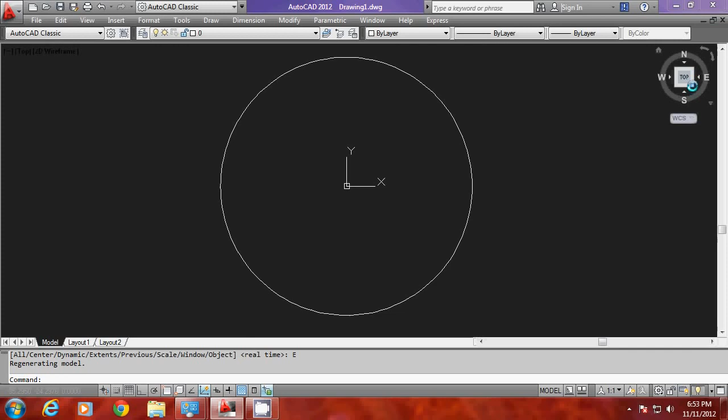Now, I would like to switch over to isometric view. I'll just click over here to get that, or else you can give viewpoint command. I'm going to add a thickness to this tabletop. I give extrude command, and when I'm asked to give the height of extrusion, I'll enter 3 because I want the thickness of the tabletop to be 3 units.

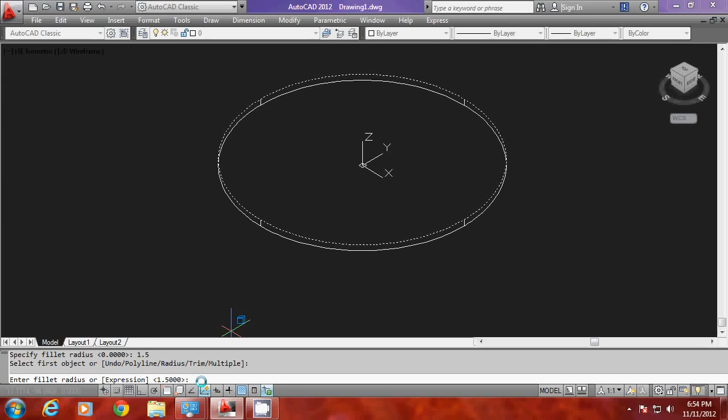I would like to fillet this corner because this corner is a sharp corner, so I'll give fillet command. You know, fillet command can always give you a smooth corner. So I'll give a radius option, and I'll give a radius of 1.5 units, and I'll select the first edge to be filleted. So it'll ask you for radius once again. I don't want to change the radius, so I'll just give an enter. So it'll ask you to select the next edge, so I have selected it. I'll give one more enter, and I have got the corners filleted.

Just give hide, but you can see that the edges are segmented. If you want to increase the number of triangles in these curved faces, you can do that with the help of a variable that is called FACETRES. So I gave FACETRES, and it can take values from 0 to 10. I gave 10. Now give one more hide to see that you have increased the number of triangles in the curved surface. Now you have got a smooth curve.

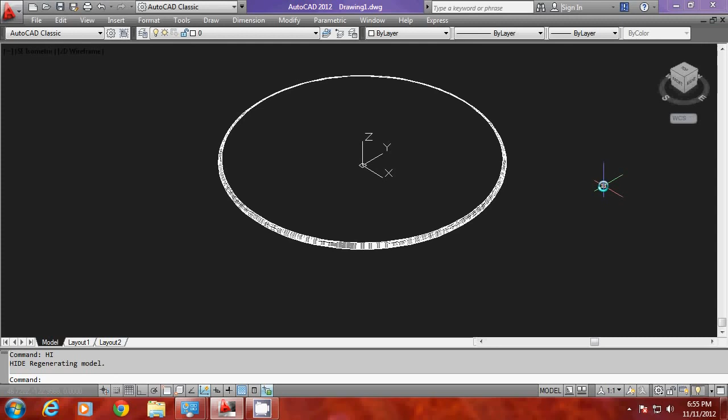Now I would like to switch over to an elevation. So I'll just click on the front over here. I've got a front elevation. Next, I'm going to create the central member which supports the tabletop. So I'll start creating it by drawing a polyline. But if you want to draw a polyline, you can't do that in the ZX plane. You know that you have to align the XY plane here. So I'll go to UCS command, and I'll go to view option of UCS command, with which you can align the UCS or the XY plane with the existing view plane.

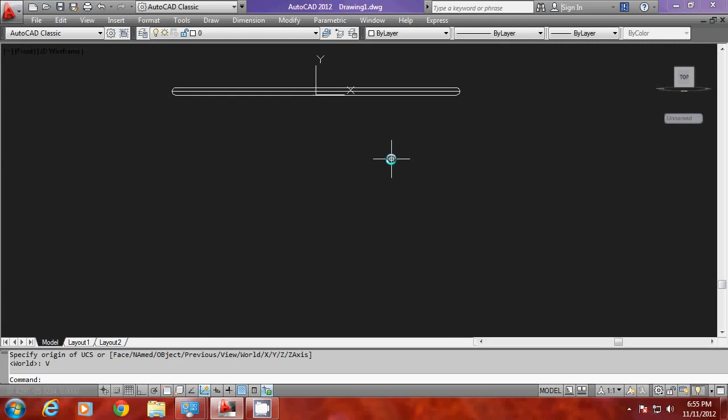Now I'll draw a polyline starting from the origin, and I'll show the length of the height of the tabletop. The height of the tabletop is 80 units, out of which 3 units is already given here as the thickness of the tabletop. The rest is 77, which I am going to indicate here. So I gave 77, so this polyline indicates the height of the tabletop.

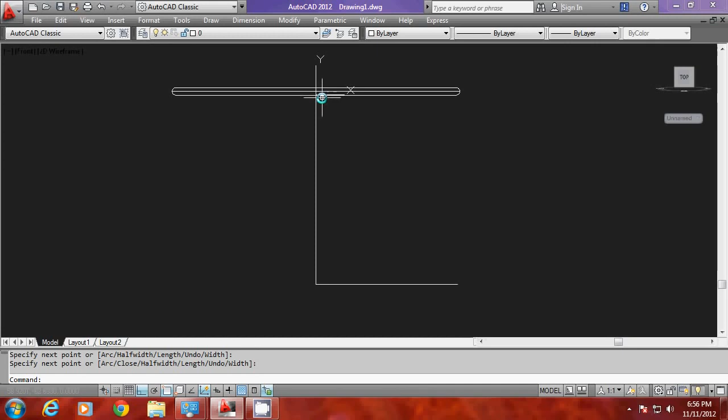Now I'll draw some construction lines. I give some offsets to draw the profile to construct the central element. So I made a horizontal line here. Now I'll give one more offset of 10 units upwards. Then I'll give another 10 unit offset, and I'll give another 7.5 unit offset. So when I trace the profile, these construction lines will be useful.

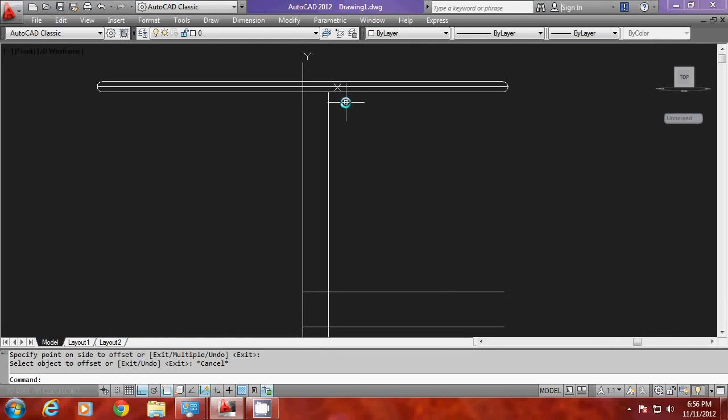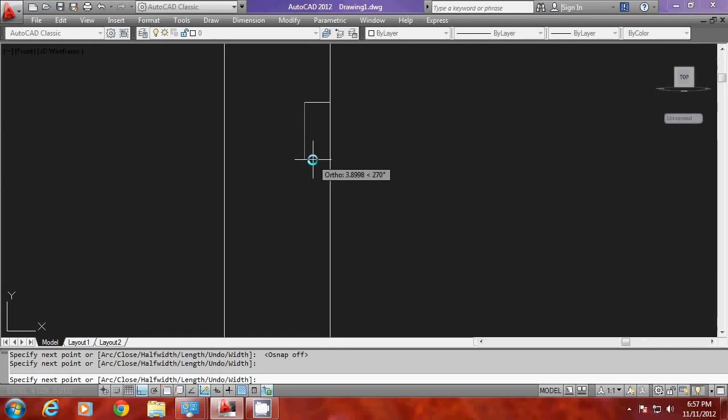Now I'll draw a polyline starting from 0, 0, and this polyline is going to indicate the profile for the central member. So the next endpoint I have picked here, I'll turn my OSNAP off by pressing F3 key, and I'll simply trace a polyline. I'll just switch over to arc option now. I give arc, then I'll go to second point to draw a curve over here. Now likewise you can sketch the profile.

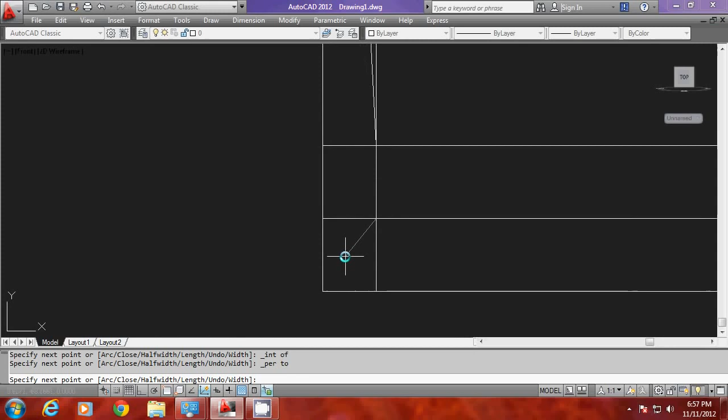Now I'll switch over to line mode, and I'll click a point over here to this intersection. Then back to perpendicular. Then I'll draw an arc like this. Then I'll come back to line mode. Then I'll go back to 0, 0 and close. So this profile will indicate the profile of the central member.

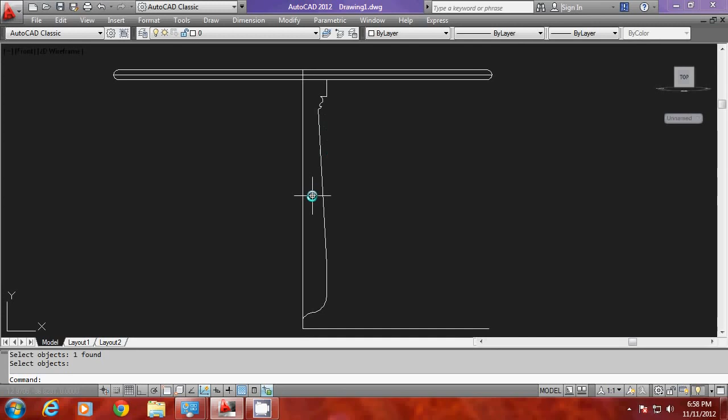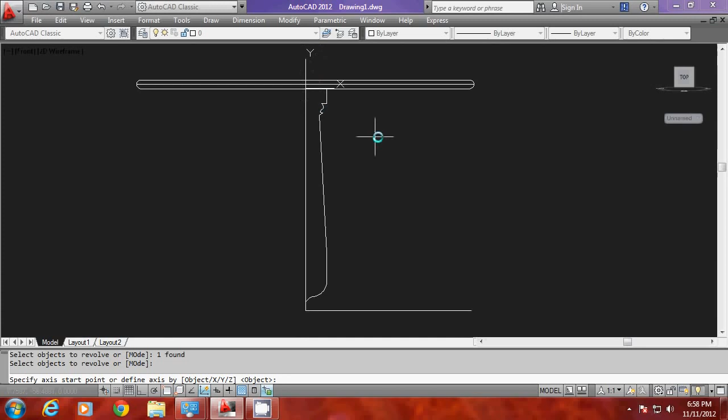This profile is going to be revolved about this vertical axis, or you can revolve it about the y-axis to get that central member. So I give a revolve. I'll select the profile to be revolved. When I'm asked to specify the axis, I have various options. I can use an object that can be used as an axis, or I can use the present y-axis as the axis. So I'll give y, so that will be used as an axis of revolution.

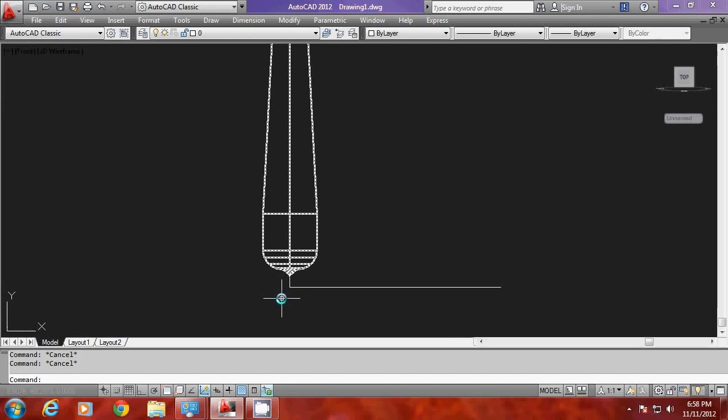Now it will ask you whether you want full circle to be revolved. Yes, I want 360 degrees. So it is revolved through an angle of 360 degrees. Now I'll draw some legs, because we need some supports here to support the center member, and these supports are nothing but legs of the table.

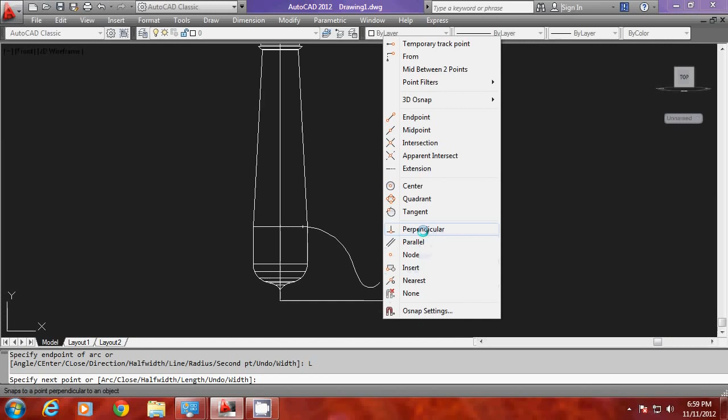For that, I will again draw profiles. I'll start from here, a profile, then I'll go to arc option, then I'll come back to a point over here, then I'll pick here, then you come back to line mode, then you can draw a perpendicular here, then you can draw another line, then I'll go to arc option and second point option, then I'll pick a point over here, then you can just go to line and you can close it.

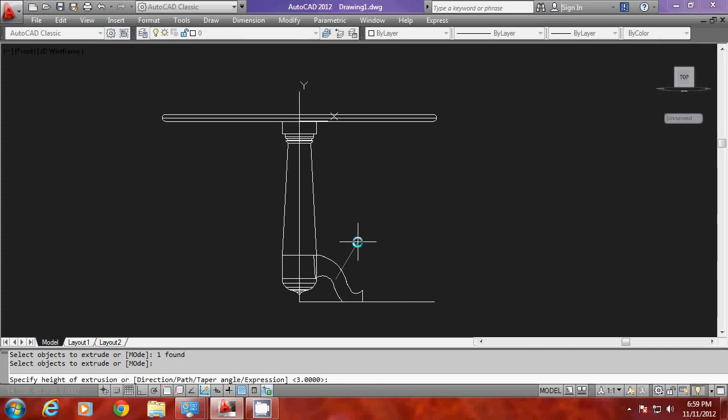So this profile will indicate the profile that is going to be used to create one of the legs. So I'll extrude this profile now, and the height of extrusion I'll give as 3 units. Now I would like to see this leg in the plan view. If you want to generate the plan view, the easiest method is you can just erase these profiles, because these construction lines are no longer required. I've erased those construction lines.

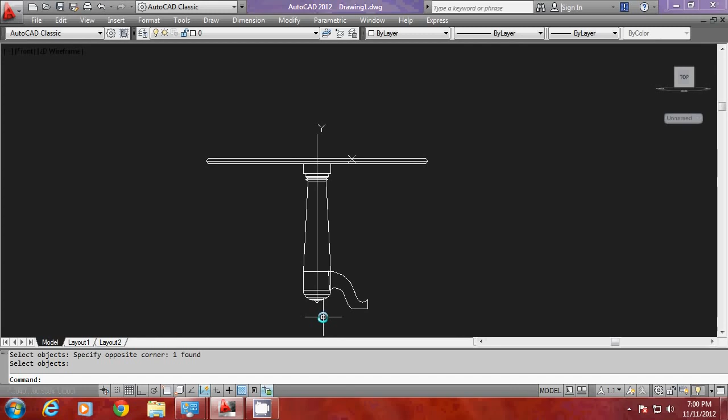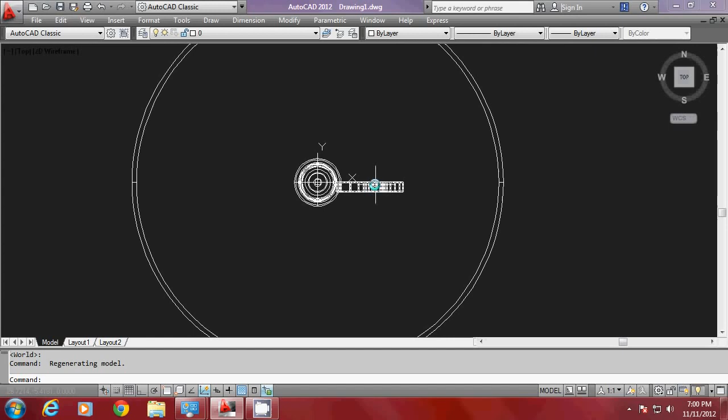Now if you want to generate a plan view, you have to first take the UCS back to WCS, because that is a reference coordinate setup. So I'll give UCS command, then I'll give an enter. So I went back to world coordinate setup. Now you can just click over here on the top, or else you can give the plan command to get the plan view. Now you can see the leg here in the plan view or in the top view, but it has taken a thickness in this direction, so it is not properly centralized.

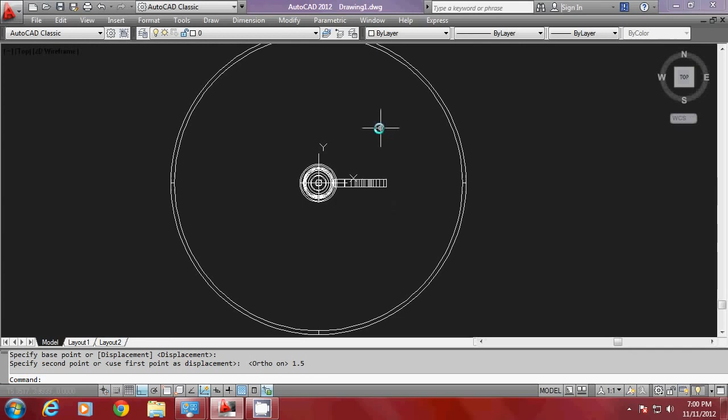So you have to move this leg in the upward direction through a distance of 1.5 units, which is half the thickness of the leg, half the extrusion height. So now it is perfectly centralized. Now I have to create multiple copies along the circumference of the circle. I'll give array classic command for that. I'll select the object to be arrayed, then polar array. It is basically a polar array.

Then center point of the array, you can select the center over here. Now number of items is given as 4. I would like to retain that as such. Now you can just preview the array. It's perfectly fine. I'll just give OK to create the array. Now I would like to switch over to isometric again to see the table which I have created.

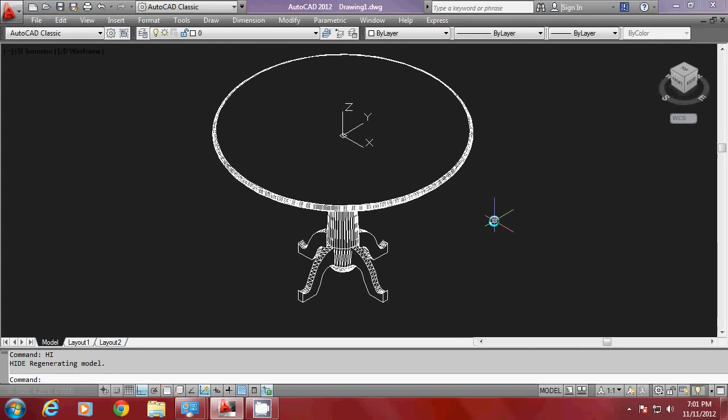If you want, you can have various representations for this table. The present representation is called a hidden representation, but if you want, you can switch over to another representation that is called shaded representation. You just go to visual styles and realistic shading, and you can orbit it, and you can view the various curves you have created for the central member as well as for the legs.

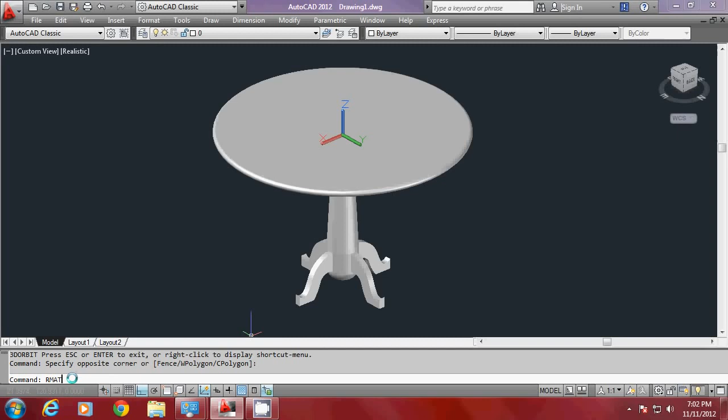Now if you want, you can go to the next higher level of representation after applying the materials. So let's see how to apply a finish to this particular table. For that, you have to give a command called rmat. Then you will get a material dialog box. In here you have the material that is required. I would like to apply a teak wood finish to this table. So I'll give, say, teak here and give an enter.

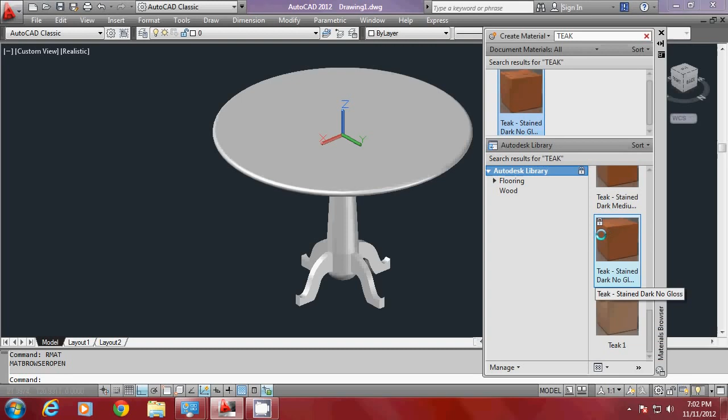So it will search for the teak wood here in the library. Now you have various types of teaks displayed here. I would like to select, for example, this teak. So I have selected it. Then you select the table, select the entire elements in the table. Just click on that. You can see that it has applied that finish over here. Just close the dialog box. Now you can just orbit it and you can view it from various angles.

But this is not the realistic finish, because shading will not show you the realistic finish. For that, you have to go to rendering. So a rendering is more realistic shading after applying the finishes as well as lights. So let us put up a light for the time being. I would like to create an omnidirectional light here. So it is better to switch over to plan view for that.

Now I'll give a command called light. So it'll ask you whether you want to turn off the default lighting. I'll just give OK. Now it'll ask you what type of light you want to create. I have a point light, spotlight, web light, etc. I would like to go for a point light. So it'll ask you for a source or the location where you want to keep it.

I want to keep the point light elevated through a distance of 100 units from the tabletop. Presently the XY plane is kept on the tabletop. So to define such a location, I should make use of point filters. So I'll go to .xy of. I'll pick a point over here. Now when I'm asked to give Z, I'll give 100 units.

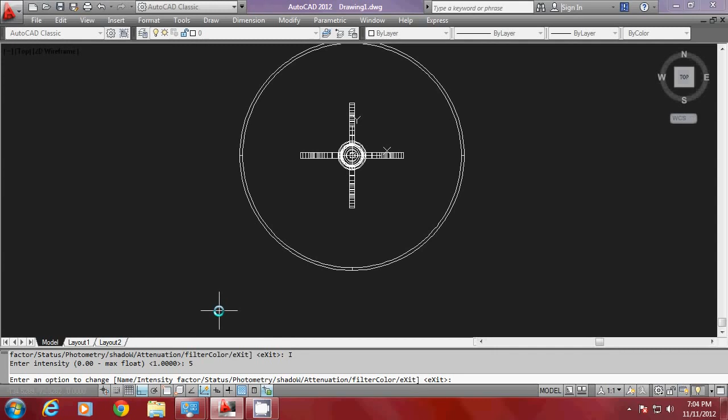I'll do it once more. I'll give .xy of. I'll pick a point over here. When I'm asked to give Z, I'll give 100. Enter. Now you can control certain parameters like intensity, photometry, shadow, etc. So I'll go for intensity and I'll give an intensity value of 5 and I'll go to shadows. The shadow by default is enabled, so I want to enable the shadows and I'll give OK.

So I've created an omnidirectional light here. An omnidirectional light is a light which radiates an equal amount of light radially in all directions. Now I would like to create a second light over here. So I'll go to light again and I'll go to point light once more. Once again, when I'm asked to give the source location, I'll use filters to define it. I'll give .xy of. I'll pick a point over here.

When I'm asked to give the Z coordinate, I want the light to be lowered. It has to be below the tabletop. XY is kept on the tabletop, so I should give a negative value. I'll give say minus 50 for the Z coordinate. And for the intensity, I'll give 5. And for the shadows, I don't want to enable shadows for this light. So I'll turn it off and I'll give an enter. So I've created basically 2 omnidirectional lights here.

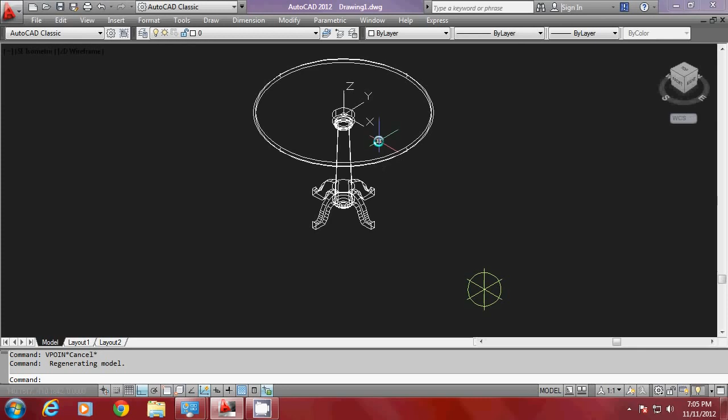Now I will go to a viewpoint, or a 3-dimensional view. I'll just zoom it. Then I can go for a render. I'll give render and enter. So you can see that it is rendering it. But if you want to see the effect of light more, you have to create a view in such a way that you can see the effect of lights more properly. So I'll go to orbit again. I'll render it.

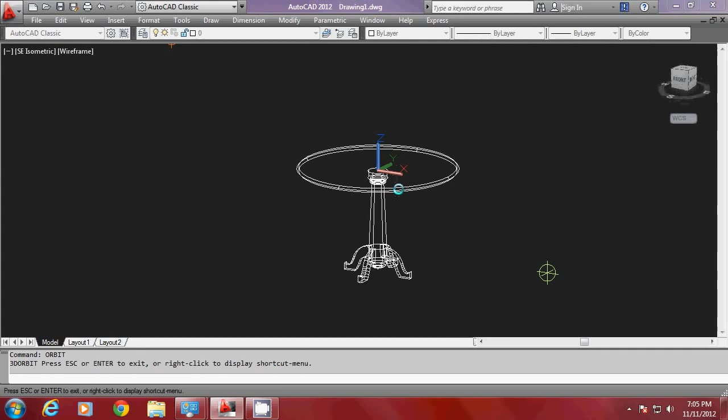Okay. There is a command called rpref. That stands for render preference, in which you can control the size of the render window. I'll increase the size of the render window, and you can also control a number of other parameters, which will be explained in detail later in a different video. So I'll give render again, and you can see that it is performing rendering, but in a larger window. But the shadow is almost obstructing the central element here.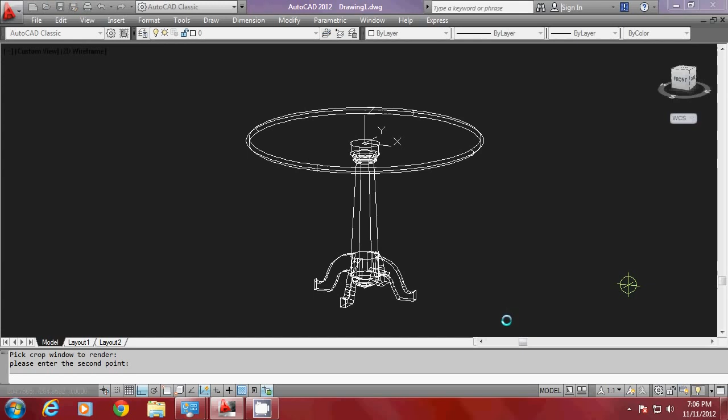You also have another option to render it, using a command called render crop. You give render crop and select the 2 corners, so you can see the result of rendering right on the screen. But you will see some jaggy edges here. Anyway, these are the different methods to visualize a 3D model. You can go for shading, or else you can go for rendering for final presentation. Hope this has given you some insights on modeling, rendering, and lighting, and a bit on finishes.